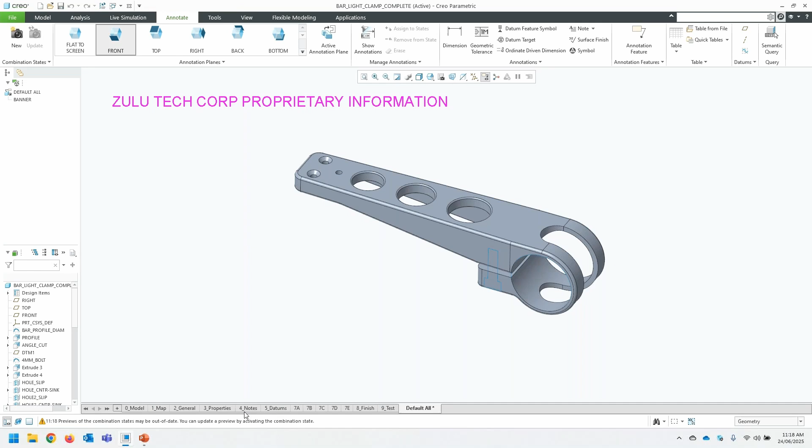That's certainly something you can do in Creo. Now, if we're looking at the MBD side of things, we're going to the Annotate tab. At the moment, notice down the bottom there's nothing. Click the Annotate tab, and then we get all these different tabs. I'll just click the first one and show you that, so that's just a view of the model. All good.

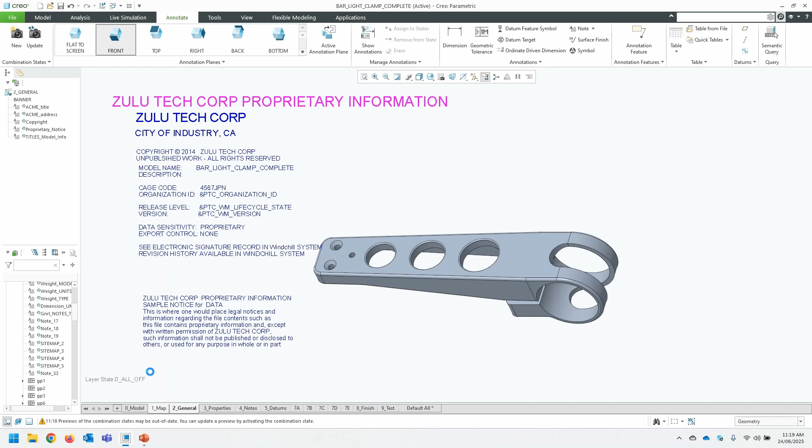The next one across is information. Now these are actually hyperlinks. So instead of clicking the general tab here, I can just click general information, and it can link me across to that tab. You have to control and click to activate it. So you can see there it takes me to that tab. I can then go back to the first one, control and click, and go to properties, which activates this tab. So you can use those hyperlinks or you can just click the tabs.

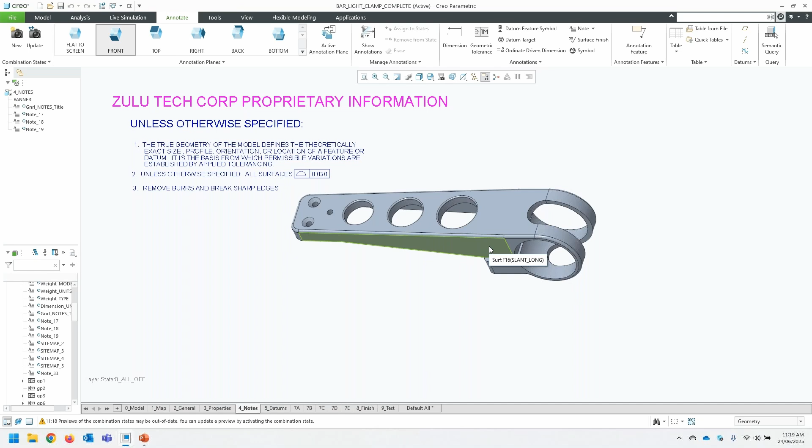So if we go across here, we can then see notes. As you'll see, the view is slightly changing, the model is moving around. That all gets saved away when you save this view. Before I go too much further, what I want to show you is...

If we go to the view manager, and if it hadn't already been active, if we were to go, let's say the simplified rep was active, we just go to the all tab, and this shows us the different combination states. These are what I was talking about before - they call them combination states, and these are what become the tabs. At the moment we can't see the tabs because we've got this dialog visible, but you can see we've got 0, 7, A, B, C, D, etc.

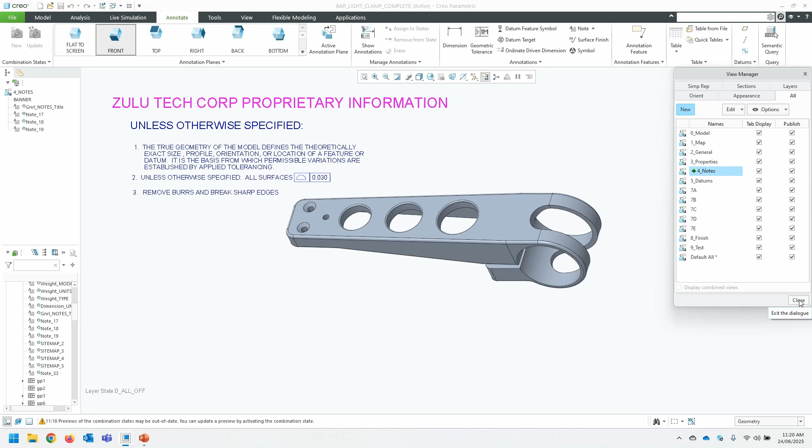If I close that, then we have these tabs, and I can just keep moving. So we've got now the datums, this is what I saw before. As you notice, as I click on these, I can still interact with the model.

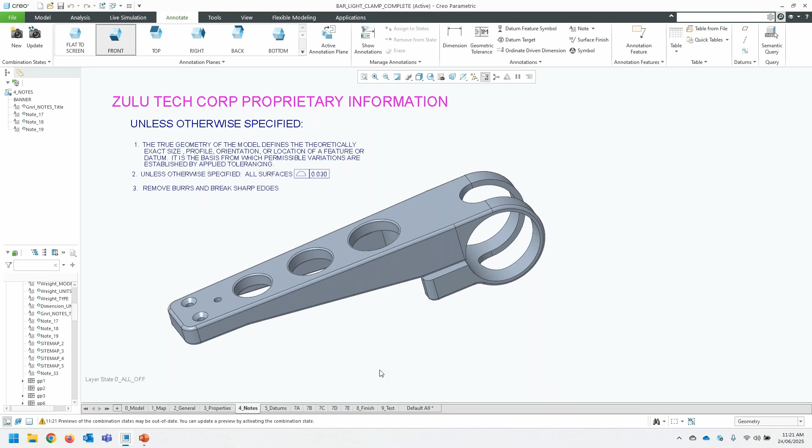I could still go back to my generic Creo model. I could go to my analysis tab, do a measure, so forth, if I needed to, or I can come back and just go to my annotation tab again. All right, let's start looking through this again.

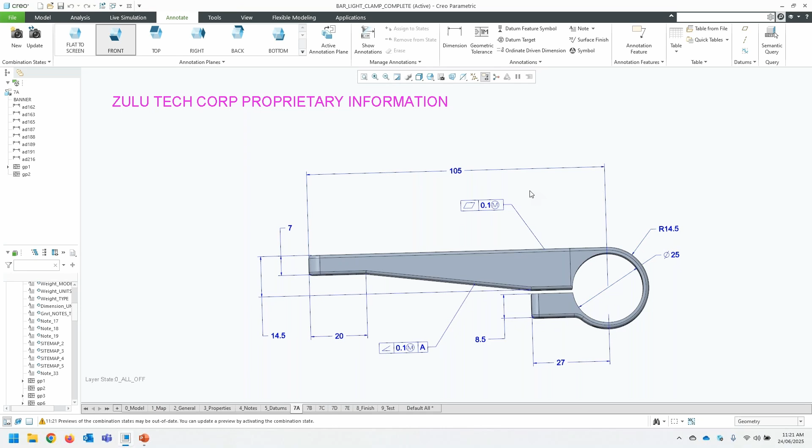So we have a few different views. We've got one here, which is effectively like, if you imagine this was a 2D view, it would be something like that. Now we could show it like that in 3D if we wanted to, or if it's clearer for us, we can show it like this as it's actually shown here. We click the next view, now it's showing this information. Again, we could show the view like this by default if we wanted to. I'll show you what I mean by that in a moment.

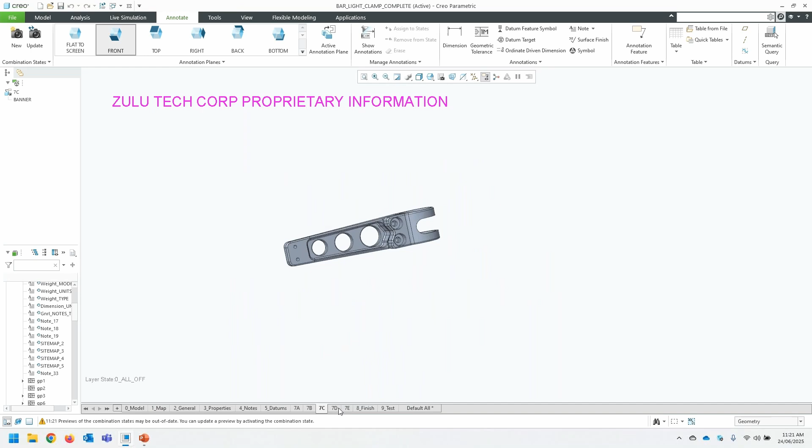So this 7C hasn't been done. If we go across to this one here, it hasn't been completed either, but let's just have a look at, for example, if we wanted to do something that showed the model with some additional info. I'll be fairly quick here.

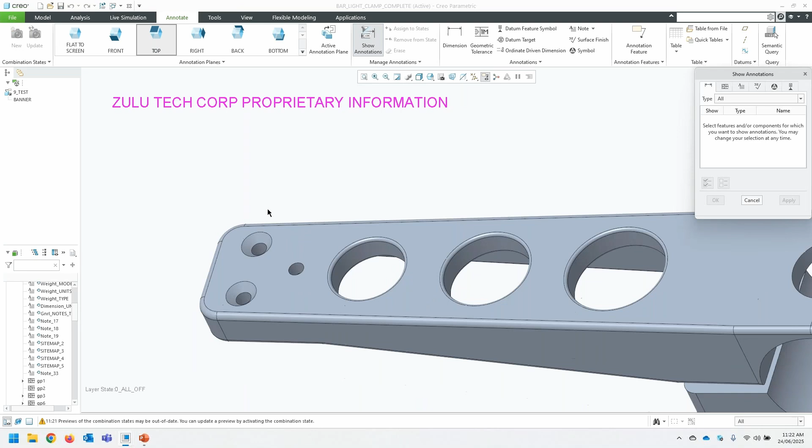First what we want to do is set our annotation plane. In this case, we're going to set it to the top plane. And then we're going to show annotations, which we're going to come in and pick some dimensions, let's say. We go apply - that's just like in a drawing going, show model annotations.

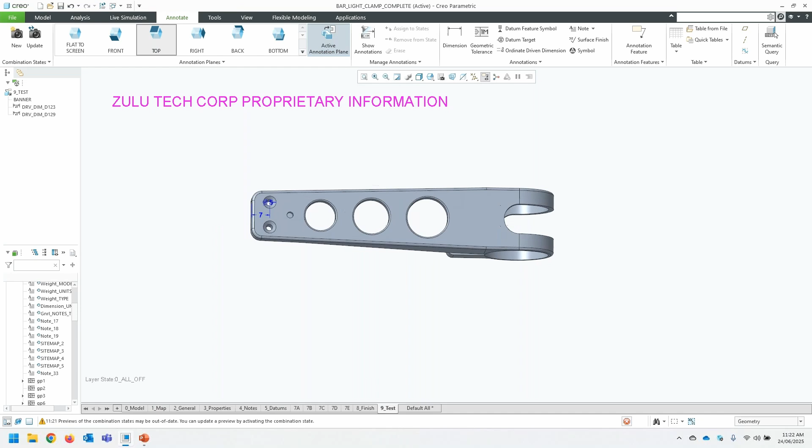I can also, if I was to set this to active annotation plane, it allows me to see it in the true effective 2D view. And then I can take these dimensions and move them around. So these are dimensions that are coming from the model. I can also create dimensions on my objects directly.

So similar again to the 2D environment - here I actually want a diameter. All right, so now what I'm going to do is I'm going to just change tabs, so you can see what I've got there. I'm going to change tab to that.

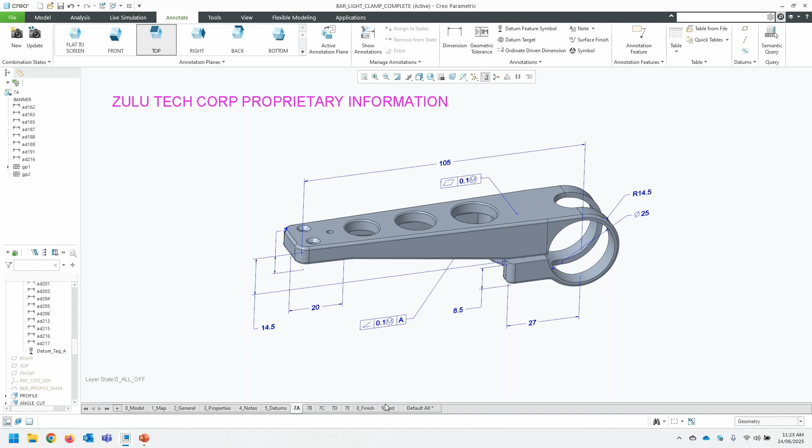I'm going to come back to my test tab, and you'll notice the orientation hasn't been updated. Now, if I want it to be updated, I can just say, okay, let's go to the active annotation plane, and then I just go update. And let's say come back to this one, and then come back to this one, and you can see now it remembers that. So I have ability to control what exactly I see once I do that.

All right, so that's fairly high level, but that's basically how it works. And so you've got basically all these options in here. You can add tables, all these other bits and pieces which I haven't covered, but certainly can be done - geometric tolerances and so on. It works very, very similar to the 2D drawing, but we're just controlling it and showing it in the 3D environment.